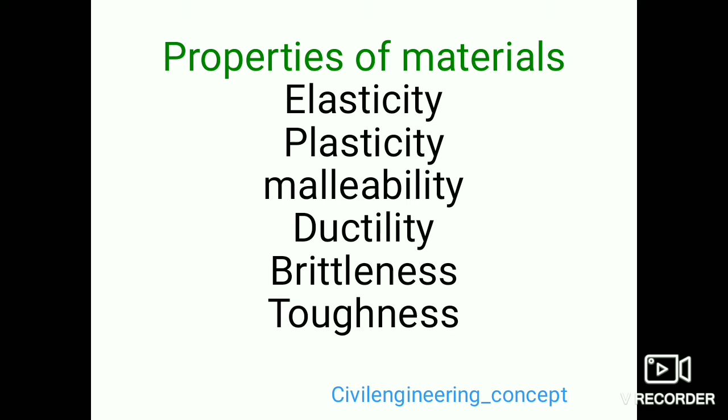So today our topic is the properties of material in structural mechanics: elasticity, plasticity, malleability, ductility, brittleness and toughness. I will teach you in a different manner that will help you to remember those properties for a long time.

First is the elasticity. Suppose you kept a rubber band in your fingers and stretch it in a different direction. As soon as you release the rubber band, it will get its original size, shape and dimensions. That's called the property of elasticity.

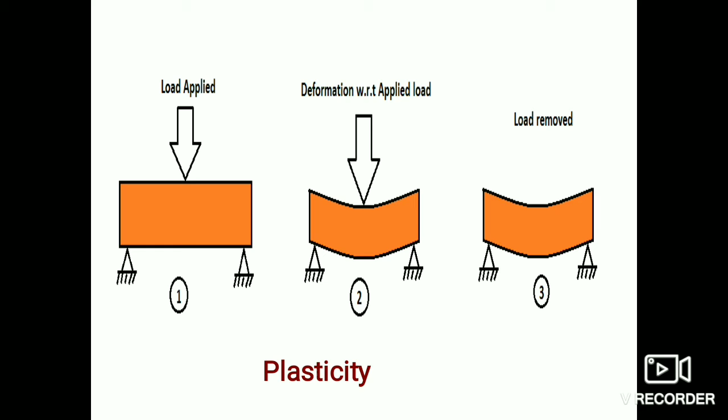So the standard definition of elasticity is that elasticity is the ability of a body to resist a distorting influence or stresses and return to its original size and shape when the stress is removed. Example is a rubber band. And the definition of plasticity is the ability of a material to undergo permanent deformation without breaking or rupturing, meaning the opposite of brittleness, that is the metal bar.

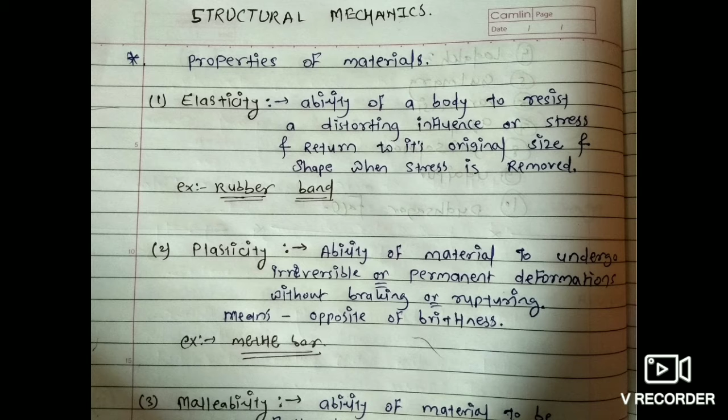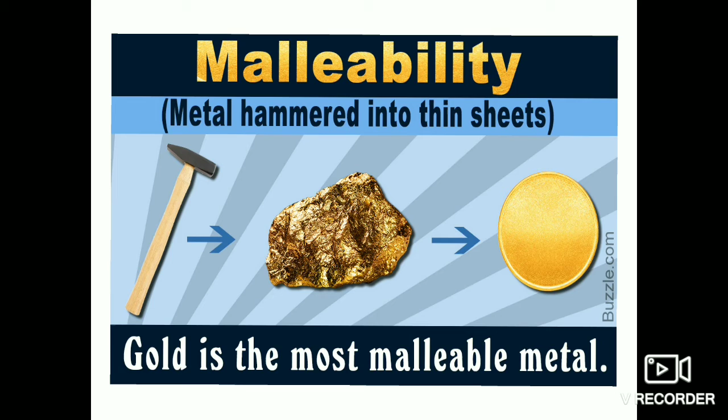So malleability. Simply suppose a gold stone or gold plate is hammered by a hammer a number of times, and this gold stone is converted into a thin sheet. This property is called malleability. Gold is the most malleable material.

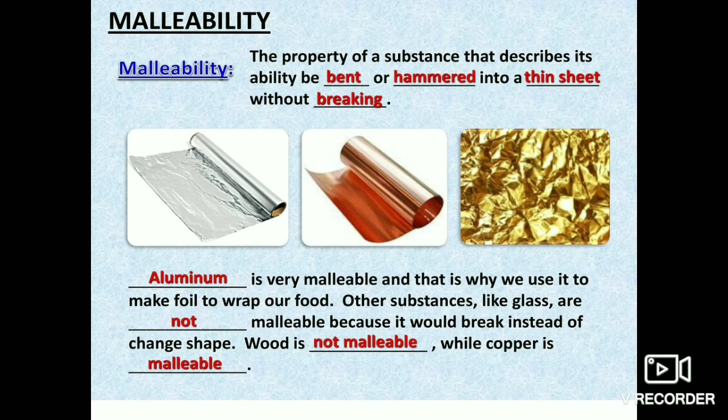Malleability is the property of a substance to get converted into a number of thin sheets. Aluminum is a good example of malleability. That's why we use aluminum foils to protect our food. Aluminum and copper are good examples of the malleable property.

So what is meant by ductility? Ductility is simply the ability of a material to deform under tensile loads, that is the percentage of elongation. These are copper wires drawn into thin wires.

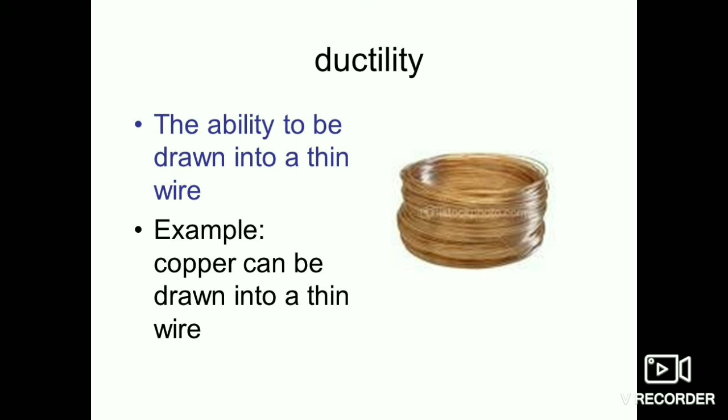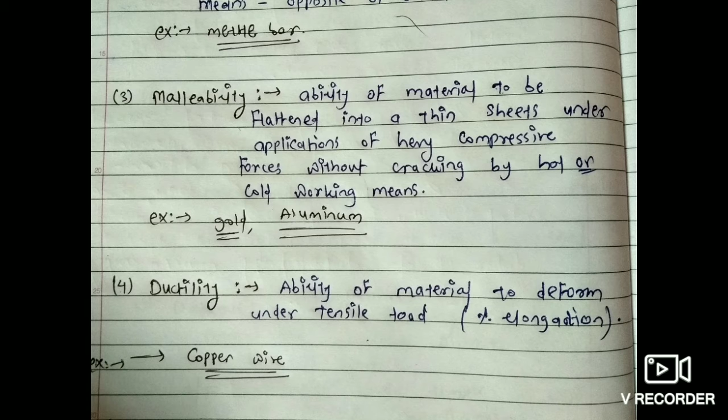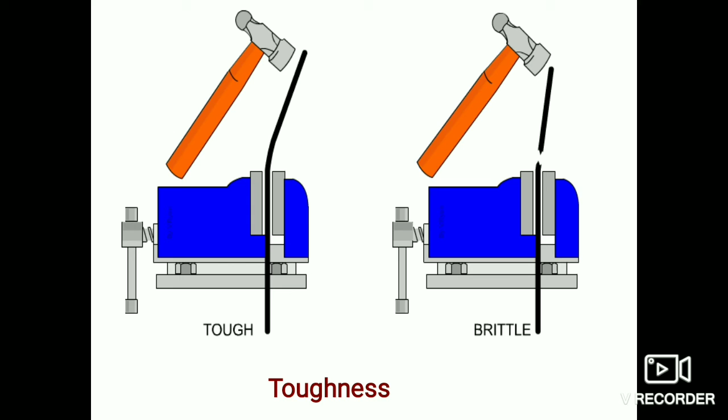On the other side, brittle material: the same rod is fixed in these machines, and when you apply the hammer on this rod, the rod breaks without giving any significant sign or warning. This is the impact due to the hammer. This bar is breaking; that is called the brittle property. So this is the toughness.

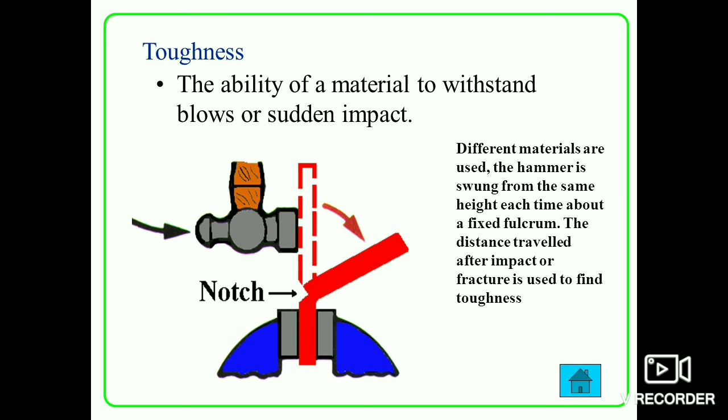In the standard toughness test, an object of steel, cast iron, bronze or any material is fixed in the machine, and a specific hammer is applied at a specific speed from a specific height, and the breakage or bending indicates the toughness of the member.

So what is the definition of toughness? Toughness is the ability of a material to absorb energy or withstand shocks, to deform without rupturing or breaking. That is toughness: a material's resistance to fracture when stressed. It is the combination of strength and plasticity.

So the definition of brittleness is the ability of a material to break or shatter without significant deformation when under stress. Brittleness is totally opposite of plasticity. So look at the environment and think about examples of brittleness. There is glass, concrete, cast iron and ceramic tiles also.

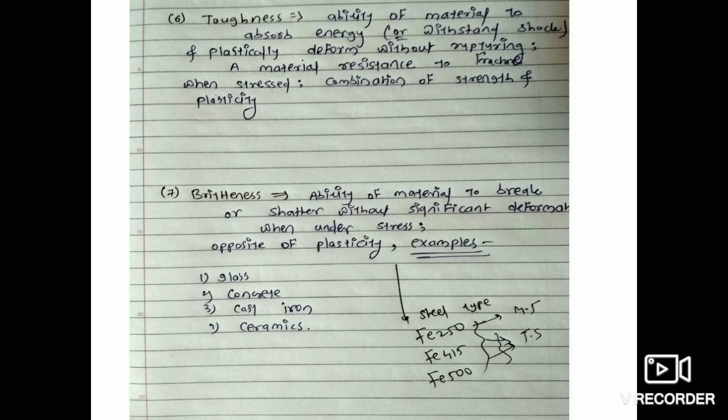So our bonus point is that in RCC structures we use steel bars as reinforcement. There are basically two types of steel, that is mild steel and tor steel. Fe 250 is mild steel and Fe 415 and Fe 500 are tor steel. Tor steel is stronger than mild steel because its carbon content is more than mild steel.

As carbon content increases, the strength of the member increases, but the ductility or flexibility of the member decreases. That means Fe 250 bars are more flexible but less strong, and Fe 500 bars are stronger but less flexible.